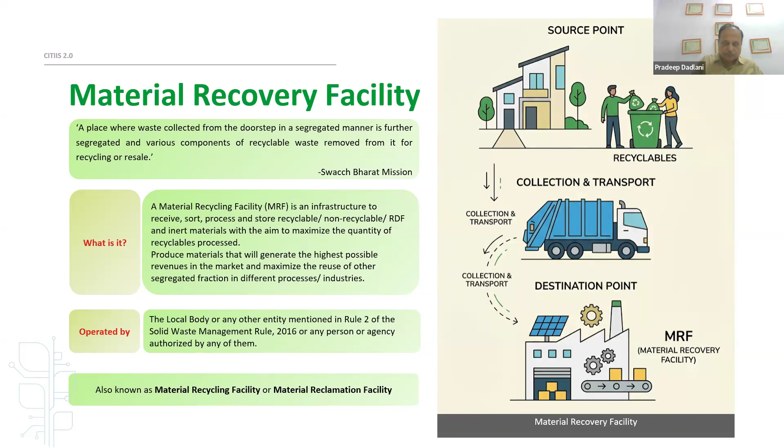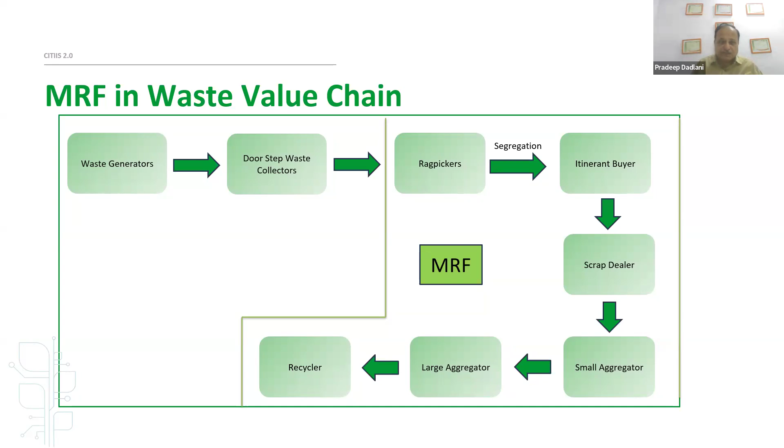Where does it stand in the waste value chain? So once there's a waste generator, then the doorstep waste collectors. Thereafter, the major processes - rag pickers indulge in segregation, itinerant buyers are there, scrap dealers, kabadi walas, small aggregators, big aggregators, recyclers. MRF is at the center stage of all this, and it plays a very important role as far as the dry waste is concerned.

So MRF capacities could vary from 1 to 2 tons per day to, we have had, 100 tons per day plus projects also. Even in CITIIS 2.0, there are many MRFs coming up with capacities of 50, 75, 100 tons. So that's a good way to really address this issue of plastic waste and other dry waste.

So what all is there - magnetic separation for ferrous metals, eddy current separation for non-ferrous metals, glass separation. You have glass mills which can be deployed, and optical sorting, so plastics are sorted through the optical method by the resins.

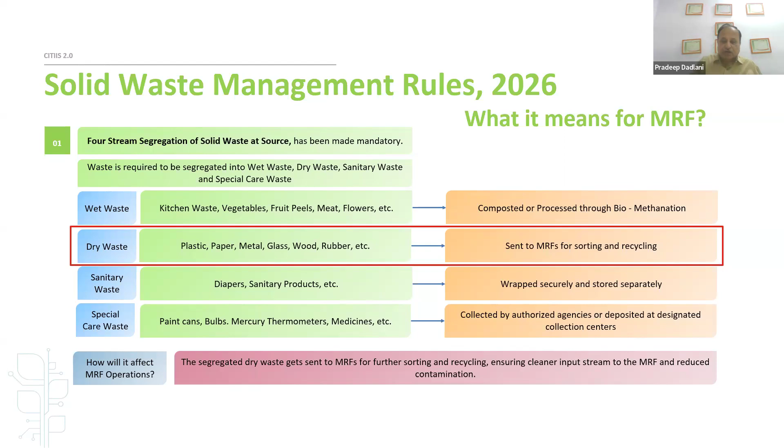Under the new rules, what are the duties of the local bodies - the urban local bodies, be it municipal council, NAC, or municipal corporation? We have a 3-tier system, and even gram panchayats have to follow this. Peri-urban areas are very important because there could be some MRFs with smaller capacity, 2 to 5 tons, which may do the needful especially for peri-urban areas and satellite towns.

Fortunately, we worked in some very small towns which are not peri-urban, but the tonnage of waste is probably equivalent to a small satellite township or peri-urban area. Port Blair being one example. So what are the duties?

Local bodies under the new rules are responsible for the collection, segregation, and transportation of solid waste. This is the responsibility of the local bodies. They can do it on their own or engage a private agency through a contract. And MRFs have been formally recognized as facilities for sorting of solid waste, especially the dry waste.

So this is a kind of shift under the new rules, which leads to MRFs gaining more importance. Also, the regulatory framework has been provided for more efficient operations, possibly greater viability and sustainability. That is what we have to strive for in all our planning, implementation, monitoring, etc.

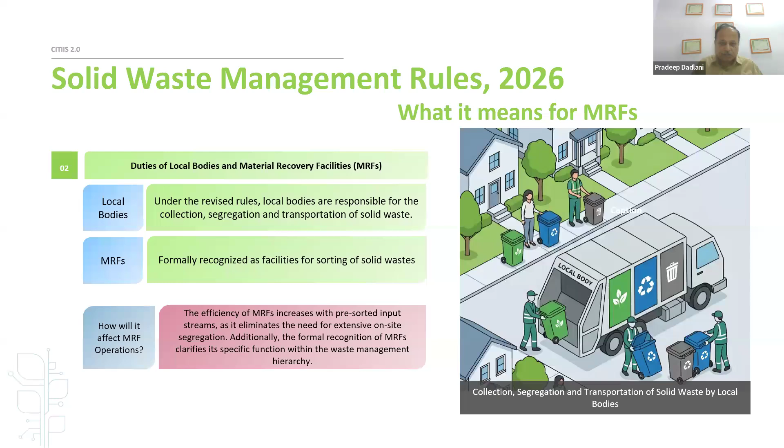This is again a game changer because the ULBs also have to ensure that unsegregated waste and unwanted waste is not dumped into the landfills, because landfills are another major problem area. The compliance of these new rules should ensure that this landfilling mechanism changes, leading to a more advantageous position for the MRF. Annual audits of landfills are to be carried out by state pollution control boards.

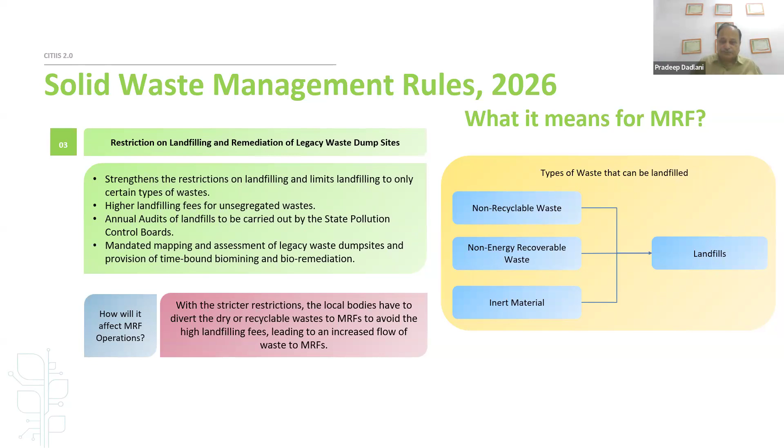This is an important subject, that's why I'm dwelling on this in more detail. The Solid Waste Management Rules 2026 is a game changer for MRF. It also defines and brings in the role, responsibilities, and accountabilities of the bulk waste generators.

So bulk waste generators were earlier defined as any entity generating more than 100 kgs per day. But now it has been made clear that any infrastructure or facility having a floor area of 20,000 square meters, 5 acres or more, or which is consuming water 40,000 liters per day or more, or solid waste generation of more than 100 kgs per day, qualifies. So it could be a hotel, large restaurant, gated residential complex, educational institute, multiplex, etc. It has been very elaborately defined under the new rules.

It gives an opportunity for MRFs because the extended bulk waste generator responsibility under the new rules mandates them, makes them accountable, and they have to account for their own waste, providing opportunities for collaboration with MRFs. That means more input, more segregated waste for the MRFs, and better economies of scale of operation. So this all augurs well for the MRFs in the coming years.

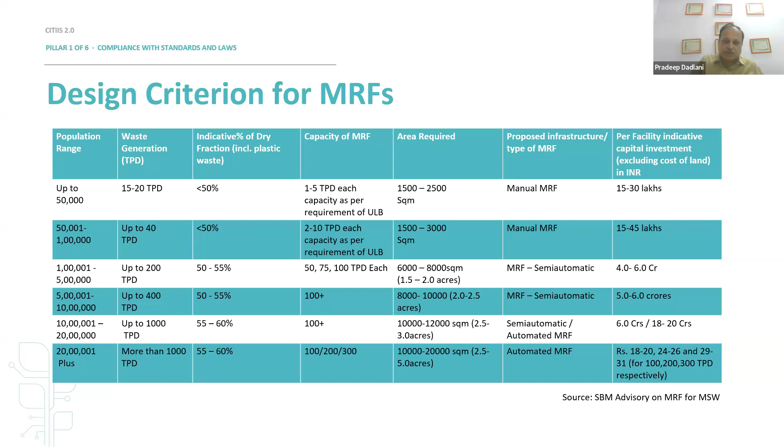Principles for designing the layout of MRF. So this will be continuing.

This is important. At one place, we even suggested a crèche for women, because they sometimes have young kids, infants, who used to come with them. So this was suggested and it was being implemented in at least one of the MRFs. These are again some innovative things which we need to look into while designing the layout itself.

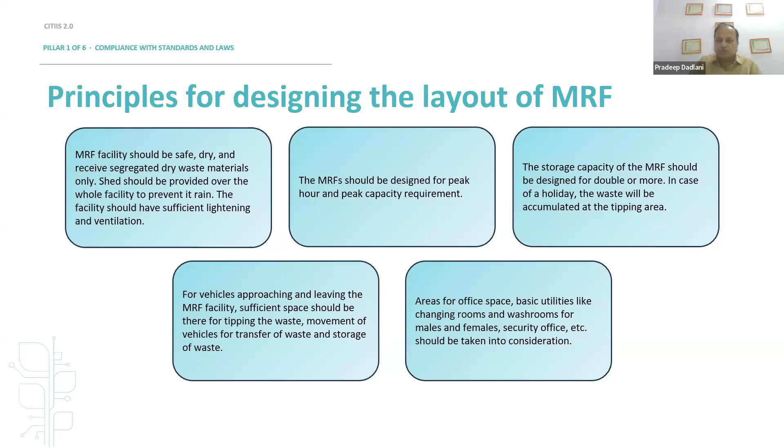And there are used cargo containers which can be used for the office, for having washrooms, changing rooms, etc. That could be just outside the MRF.

I'm just driving home the point that it may be a good idea to have decentralized MRFs zone-wise, for example. This is what we have proposed in some cities, rather than having one large MRF, which gives economies of scale, but then there is also the problem of larger cost, transportation costs, more segregation required, and more compliance requirements. So it may be a good idea - each city can plan on its own, or decide what works for them basically.

Pillar two is the backward linkages. So MRF stage - we discussed this, the upstream and the downstream. Which are the core processing hub, MRF. So basically MRF adds value by converting mixed recyclable waste into clean, marketable material streams.

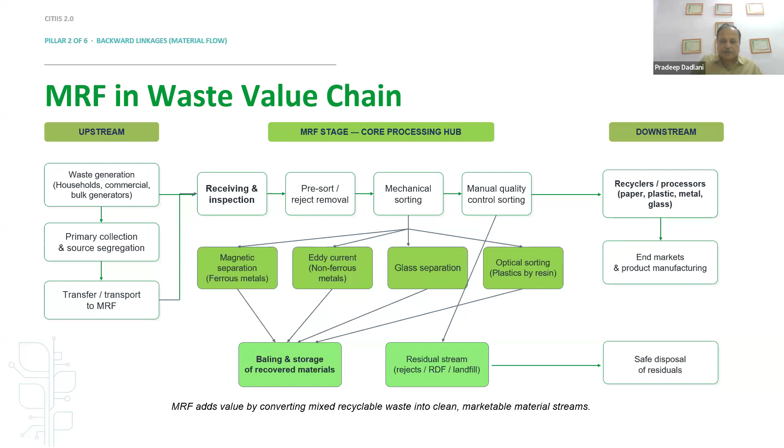Continuing with the same pillar two, how to set up an MRF, finalizing the capacity of the MRF. So understanding the regulatory institutional framework of that region, ULB, or the state. There have been states where the bin-less system is followed, for example. It could change the plan for proposing an MRF. It could be one of the decision processes or indicators.

Selection of wards and land identification. Land remains a major issue in most of the cases, but the good point is there is enough land available typically with a ULB, because this doesn't require too much land, unlike a large processing facility. Population forecasting for selected wards up to the design year. Waste flow analysis, characterization.

Waste reception and input handling. This is important because the collection and delivery - when it is the drop-off point at the MRF, when it is delivered there - this is the first physical link in the backward material chain.

Weighing in is very important. Sometimes we have observed the quantification and weighing is not done properly, so they are happy with the material being received and they just load it onto the conveyor belt, for example, if it is a mechanized kind of sorting. Initial inspection - this is very critical. There has to be a protocol for this, which has to be developed. This is very important, and it also protects downstream sorting operations and worker safety.

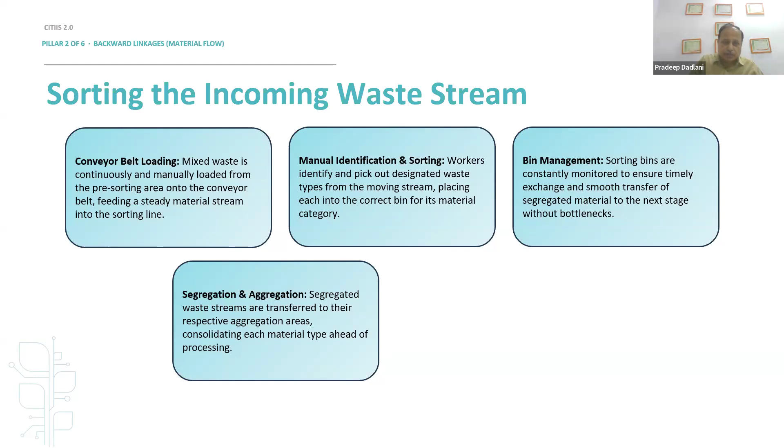Typically, these should be 30 to 60 kg per bale, but I've seen in Kochi bales weighing 90 to 120 kg. But ideally, in a vertical baler, we all try to have about 50 to 60 kg bales.

Bales are made because it's easier to load and transport them either to the cement kilns or for recycling facilities. We worked on a project in Nepal on recycling of PET bottles, which are all coming to India to the plant called Ganesha Ecosphere, and this was before the new rules in 2016. So even after traversing a large distance, it was profitable for the baling person there and also for the unit in India. Just to give you an example.

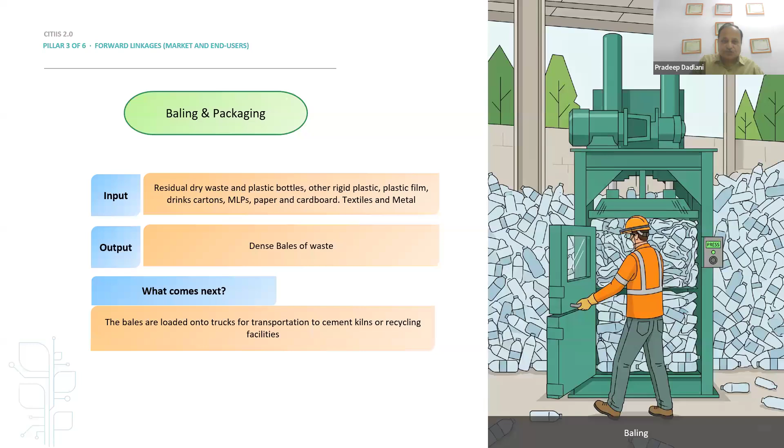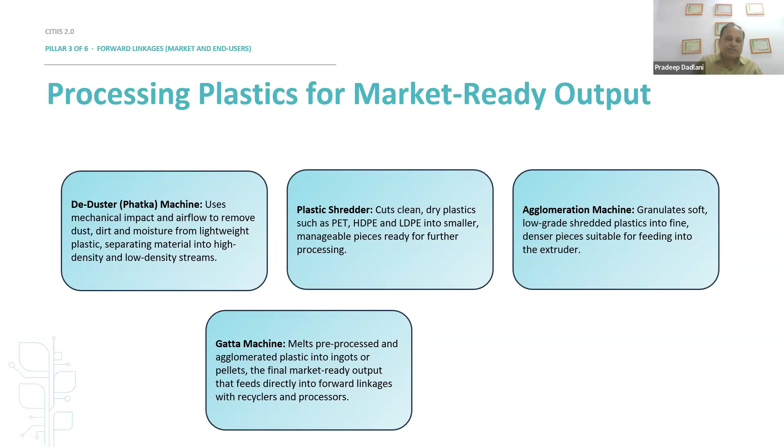This is the final market ready output, and it can either be sent to the recyclers and processors. There are jumbo sacks which can be stored and transported. In addition, there could be glass shredders or glass hammer mills, and for coconut recycling units, though it's biodegradable, sometimes it gets imported - there's separate equipment put for the coconuts also.

Market linkages and buyers: aggregators basically purchase in bulk, and multiple MRFs would sell material to them. Recyclers and processors - this is very important because I worked in a cluster which is probably the biggest cluster of plastic recycling in the country, called Malegaon, 90 kilometers from Nasik. So this MRF linkage, the forward linkage with the recyclers and processors, is also very critical.

With the cement plants, each MRF starts looking for linkage, even those which are not performing well or are not getting high value plastics as input - for them, cement plants remain one major source. We worked in Kanpur, where the material was going all the way to Jharkhand and Chhattisgarh, the RDF from there, from the MRF. Waste to energy and thermal power plants is also important.

Road construction and other industries is an additional linkage. As I mentioned earlier, in Bengaluru we visited one plant just 3-4 days back, where they are creating this material under an ongoing contract with BBMP, the ULB there, and they are supplying this for road construction at a fairly good price, 22 to 23 rupees per kg.

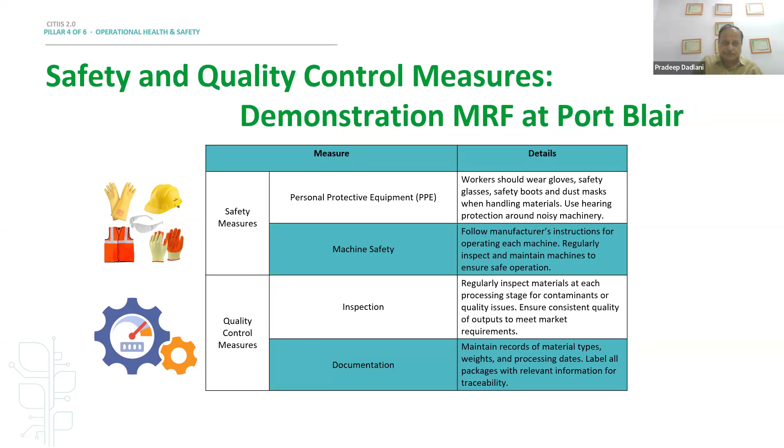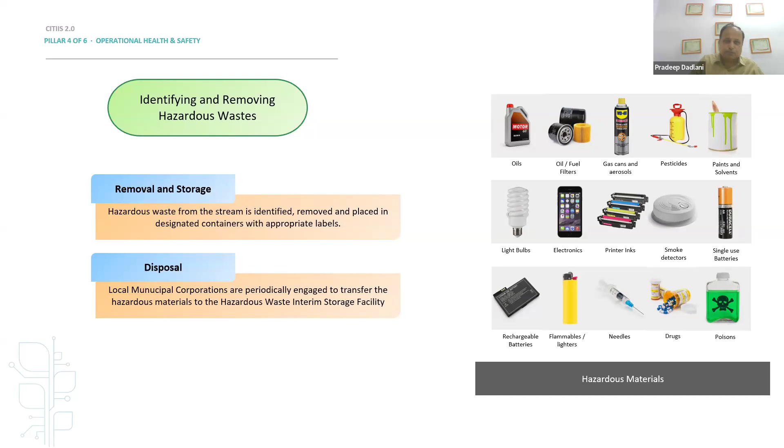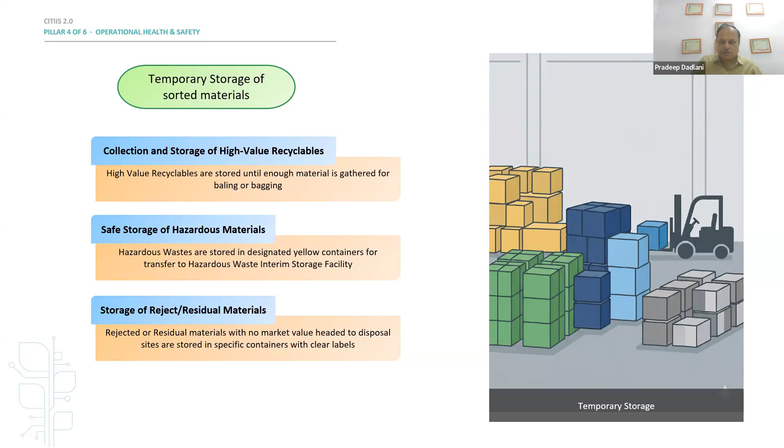How to set up an MRF. So this is part of the environmental and social aspects. Environmental aspects would include site selection, design, operational considerations, community safety and health considerations. Social and gender aspects - as the moment the capacity of the unit goes beyond 5 TPD, there has to be further compliance with the State Pollution Control Board as per the regulations. So this is one aspect which has to be kept in mind.

Again, all the relevant state government or ULB guidelines have to be followed for the welfare of the workers and also the best practices.

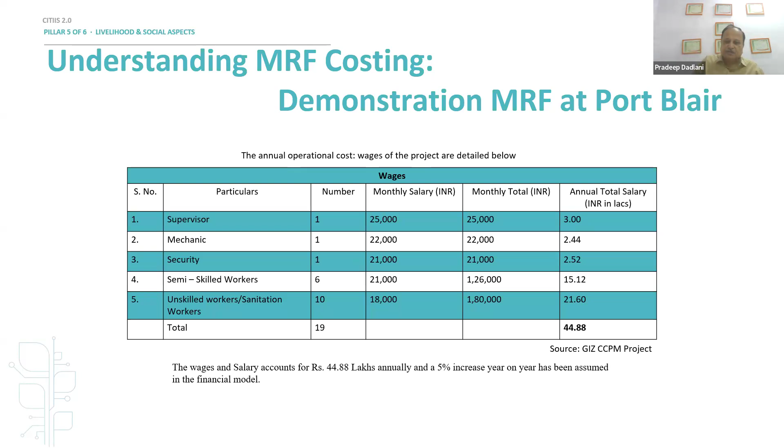Again, this is taken from a typical actual unit, just to give you an idea. So you'll see mostly it is the semi-skilled and unskilled workers. Unskilled workers are basically the ones doing the sorting. Even if it's being done on a conveyor, they are the ones doing the segregation, so to say. The operational part is not so labor intensive. So in any MRF, you'll see the unskilled or semi-skilled workers would be playing a major role.

Training and capacity building, pillar 5 - again, this is the SOP. You have to prepare standard operating procedures for an MRF. It would not be just a standardized document, but relevant and specific to that particular unit. That is important. Though it is called SOP, safety training of all stakeholders, technical training, especially for the equipment and all the auxiliary equipment - all this has to be worked out.

Business training, because this is important. If we just keep on operating an MRF and it is not given to a private agency under a PPP model, they are not really benefiting. Then they lose interest. So business training also in terms of how to have better backward linkages, forward linkages, maybe get into some value-added products, and generate maximum possible revenue for the MRF.

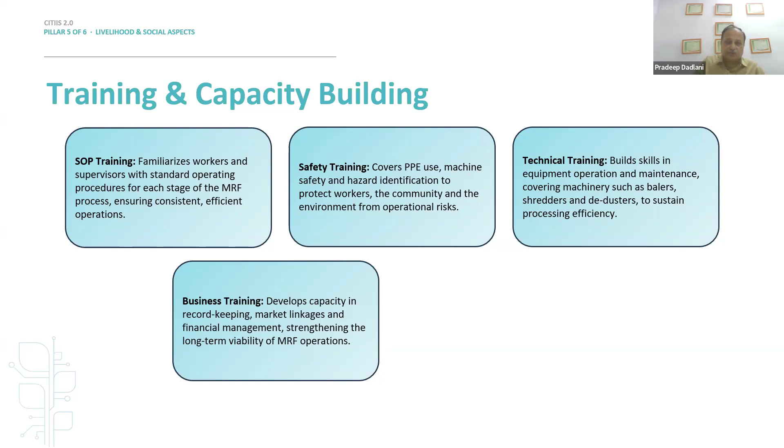Community engagement and livelihood integration. So informal sector integration is very important. Similar is the itinerant buyer and the doorstep waste collectors. So MRFs should strive to get them integrated. They are the key actors or key stakeholders.

Community engagement and awareness - we have seen this working effectively. If we engage the community, they have had cleaning drives on the port, and the plastic collected from that was linked to an MRF. They were able to get the dry segregated plastic material sent to an existing MRF, so at a low cost they could get the required plastic waste. Community engagement, especially in view of the new rules, becomes important because they should know how to segregate and what would go to an MRF eventually.

So all these aspects - health and safety for waste - this is the first and foremost requirement. Capacity building for ULB officers is also important. It's not just the workers who are there, but also the ULB officials, starting from the executive engineer, the supervisors, the sanitation inspectors. They should realize the significance of the MRF, how it operates, and what kind of input material is required for an MRF to operate effectively.